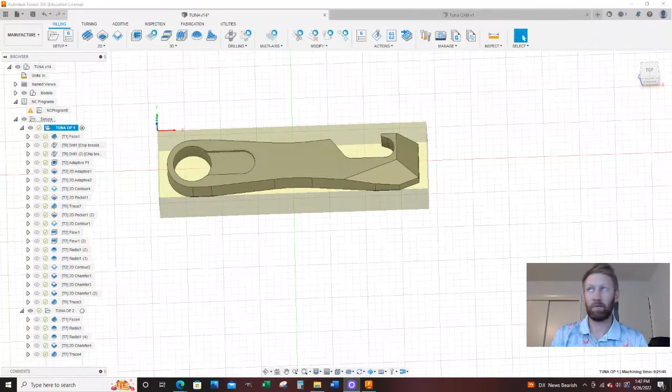Let's show you real quick what I'm talking about. So in Fusion 360, this is our stock right here, this yellow kind of weird box. And then we're going to set our work coordinate system, so our x0, y0, z0. After we get this all set up how we want, we're going to do a face mill pass and a drill, and we're going to call that Stage 1, because as you see, I have a whole lot of tool paths here.

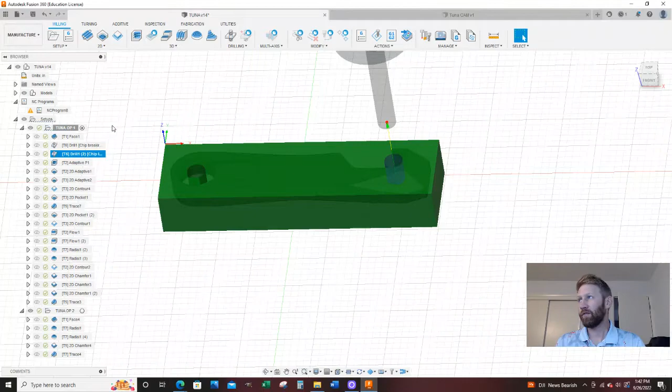So the first thing I want to do, this is my completed one, is we need to set up the stock. So when I refer to stock, I'm literally talking about the aluminum stock that we're going to start machining with. In this case, these are our saw cuts, I don't know how clear you can see it. We're going to make it in the X dimension 3.75 inches long, 1 inch in the Y, and 0.625 inches in the Z. So that's 5/8, 1, 3 3/4 if you want to use some fractions.

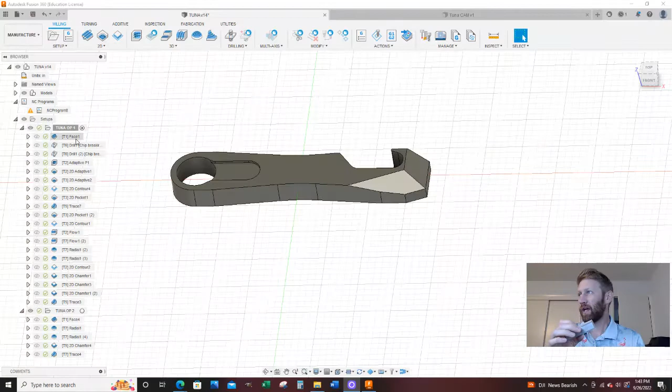And what does that represent? So that stock, this stock in my hand, represents this ugly yellow box right here in Fusion. That is exactly what we need to create first.

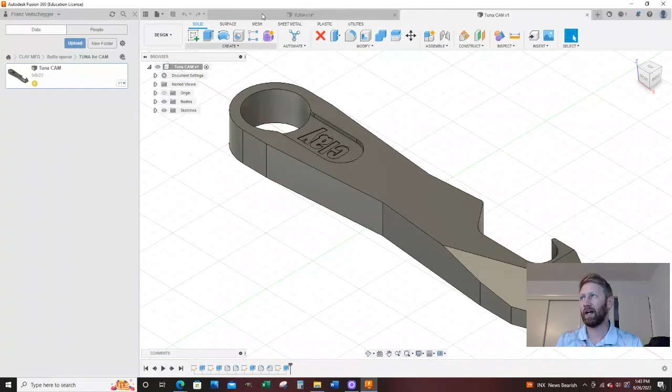So this is my completed one. Let's flip on over to where I would have left you off in my modeling. Before you get started, you could go ahead and save a different version or continue working off your version. I have several versions—this is my CAM for instructional videos, so I saved it separately. Generally in Fusion though, you want to keep all your designs in the same file and then build your CAM off that design; I'm just going to have a bunch of separate files. But here you are, you finish your modeling, everything works great.

We're in the design environment, so from design I need to hop on over to manufacture, and this is where we can set up our stock and our tool paths. So this is our CAM. Let me make sure I don't have a setup right here already. Oopsies, do I?

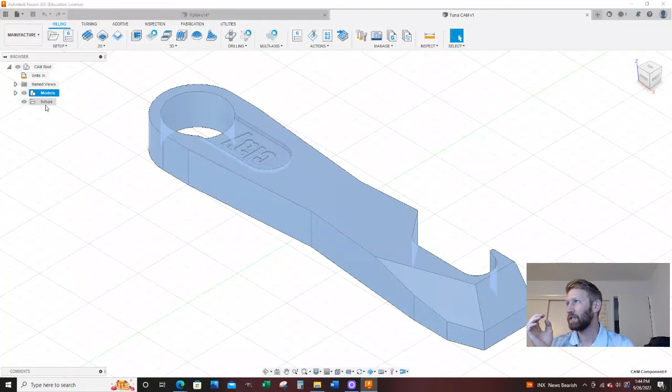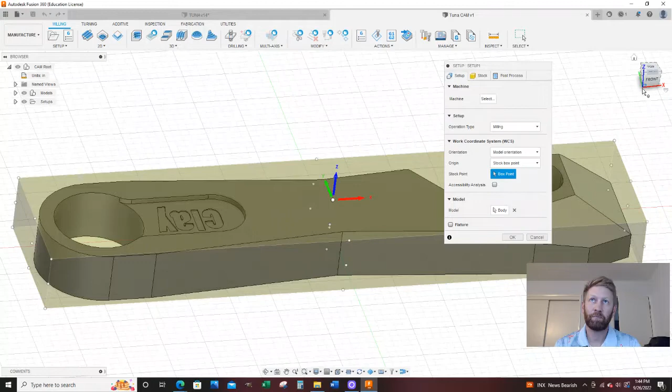Let's go. The first thing I'm going to do is go to setup and say new setup. I want to come over here—if your X, Y, and Z are oriented like mine, whenever I set up Fusion in the modeling, it should be how mine was, where if I'm looking at the top of the view cube, I have Z up, X to the right, Y away. It's like I'm in a 3-axis milling machine looking down at my part.

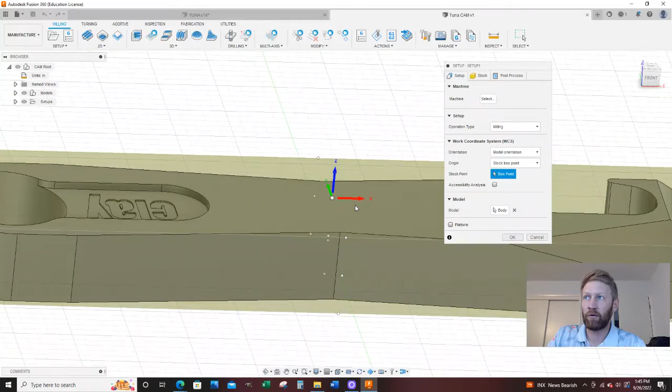So the top view has the most features usually that I can machine from one operation. And if your work coordinate system, the WCS, your XYZ, matches mine right now, where Z is up, X is going to the right, and Y is going away, then I'm just going to hop on over to my stock. Now, hold on.

If it wasn't set right, you can force it to how you want. So you'd go to orientation, select Z axis, and then force what direction I want my Z. And if the X and Y are still not going the right direction, it says Z axis and X axis, so I select my Z—I know I want my Z up—and then I would define my X axis as well.

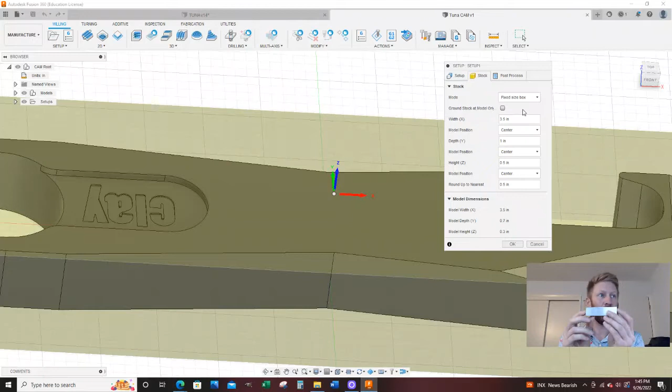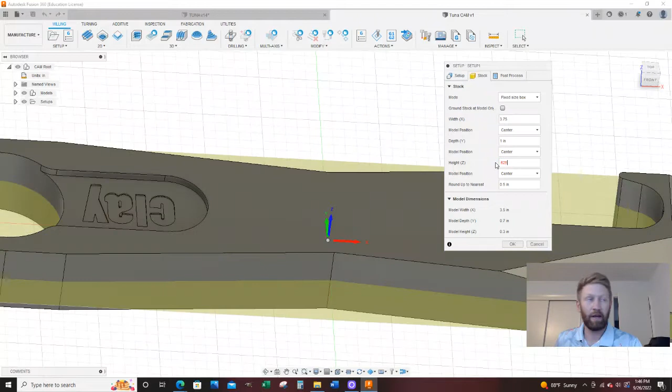But mine looks all pretty, so I'm going to hop on over to stock. For mode, I want to do a fixed size box because we're starting with a fixed size stock that I cut on my saw. In the X dimension I want 3.75, and I want the model position centered. Y is 1 inch, and the thickness of my stock is 0.625. This is just standard aluminum I can get at the store at the local metal supplier where I live—it's a real common size.

And here's where we got to start paying attention. You see, when I have my height and my Z, it automatically keeps—this is the model, it's the actual model, the bottle opener. Sorry, I've got a lot of projects on my head, so sometimes I get the wordage mixed up.

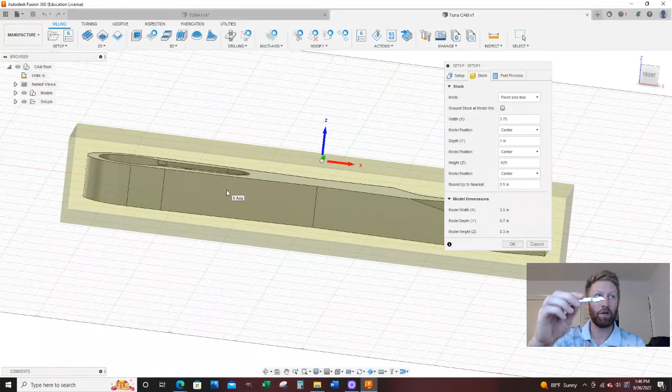But this is our tuna bottle opener. Now I want the model positioned at the top of my stock. So check this out—oopsies, let's see if I can change my screen. Apparently I'm looking at the wrong one. That's cool.

So the way this is machined out is I have the model positioned at the top because I want to elevate everything in my vise. And I'm going to have it sitting on parallels. We're going to use 1.625 inch tall parallels that are 1/8 of an inch wide, so it's a typical standard tallest parallel in a common parallel set.

And I want my model, that little bottle opener, to be at the top, so that way I've got extra material to grab down here, because the vise is going to clamp on with the tallest parallel about 100 thou, about 110, 111 thou. So I want to be safe. I want my model at the top.

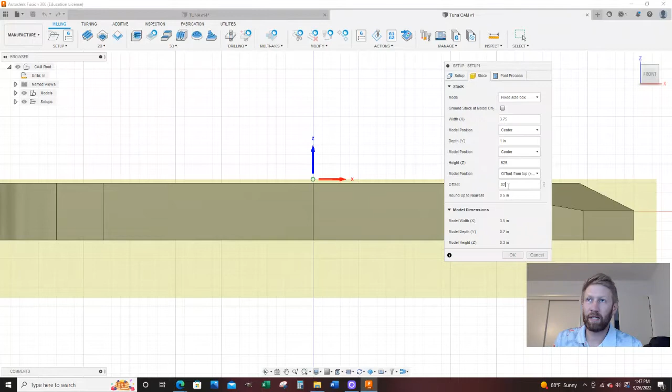So what I'm going to do is model position. I'm going to say positive Z, and we're going to offset this thing by 20 thou. I'm going to say 0.02, so I'm leaving a little extra. What I did was model position offset from Z positive, and then I updated 20 thou right here in the offset. And now we're on the same page.

So I want to leave a little material because I'm going to cruise down with a face mill and skim off that extra material. Now, our work coordinate system, we're determining how we're going to actually locate our work piece.

So in this example, I could leave it in the center, especially if you have a probe. You can probe on each side and then get your center. Even without a probe, it's usually more accurate to have your work coordinate system in the center, so in case your stock changes a little bit in the X or Y dimension, it's still centered.

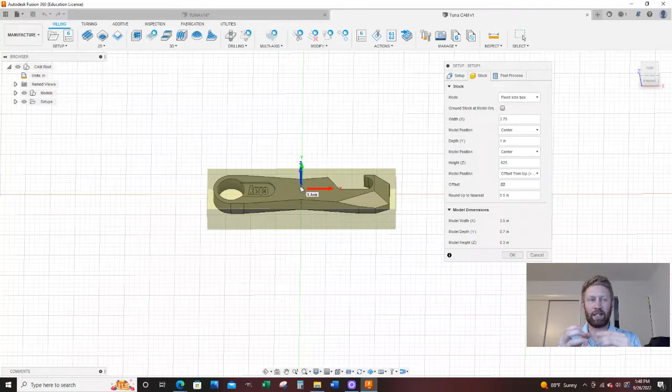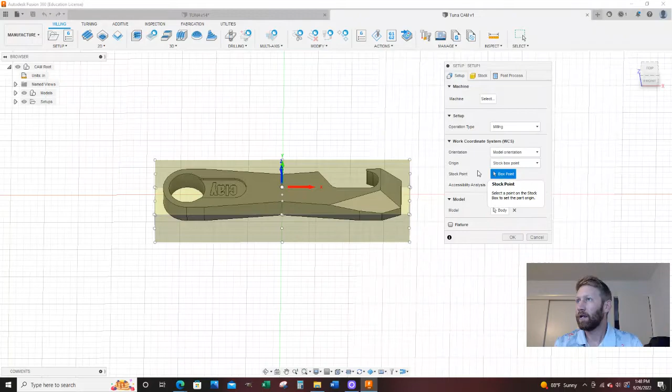However, to keep things easy, we're just going to put it, which is also a pretty common practice, on this back left corner. So I'm going to go to setup, and I want to choose a stock box point, and it's literally talking about a stock box point. I'm going to see my stock box highlighted in blue, and when it's like that, I'm going to come over here and click on this point.

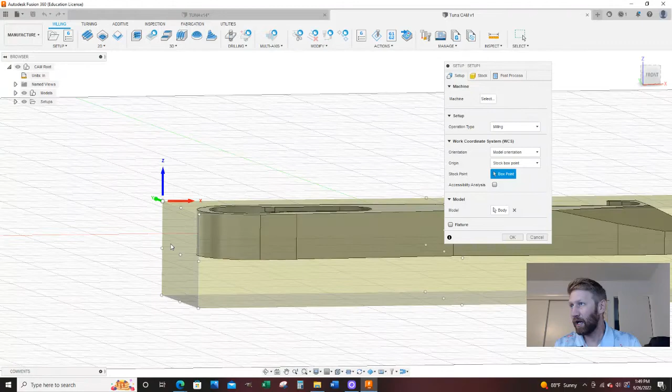So this means when I'm using my edge finder, we'll use a wobbler edge finder in this case, or a Haimer, I'm going to touch this off of my X, my Y, and the top surface will be my Z0. So if I look at the front, this is my Z0 reference plane, and this is my saw cut, and then this ends my saw cut, which I typically want to avoid clamping. And this is my Y, the part that's going to be resting against my dead jaw. That is how we're going to set it up for this one.

Makes it nice and easy. So, okay, there we go. We have set our stock with our model inside of it.

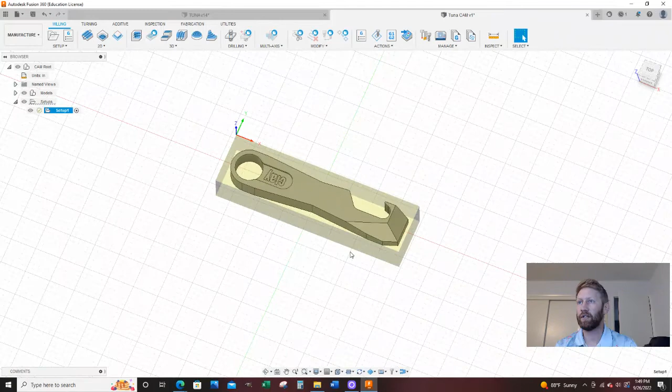Beautiful. The first thing I'm going to do is a face pass, so I'm just going to deck the top off, make it nice and smooth and a flat machine surface to work from, get rid of any surface imperfections, anyone dropping it off of a forklift during shipping, whatever. I want a nice clean surface to work with. Not every application needs to be faced, by the way.

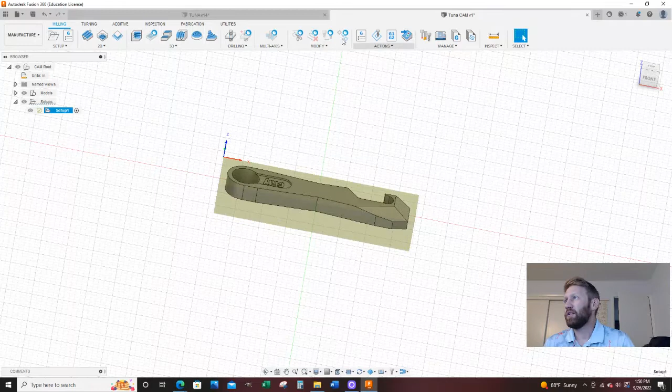How am I going to do this? I'm going to go up here to 2D, and I'm going to go face. And for my tool, I'm going to come up here and click on here.

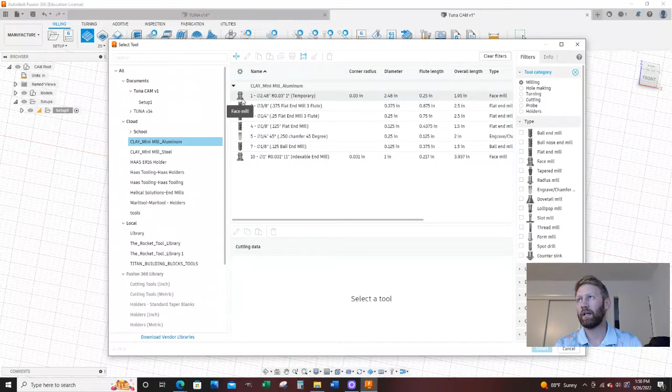Now on my website, I have my tool library posted, and this is the clay mini mill aluminum. I try to set this up the best I could for the time being, using the exact same equipment that I'm using. So for my face mill, I have a Maritool, it's a shell mill, a 45-degree shell mill. The icon you're going to see is not super representative of it, but it's going to work well enough for this application.

So yes, this needs work. If I get enough traffic, then I'll make it look more pretty, but right now we're going to deal with it. The other ones I have are Haas, so this is a whole entire Cat 40 tool holder. This is a cutter that I'm using. I buy a lot of the Haas tooling, and I'm not sponsored by anyone at all, out of my own pocket.

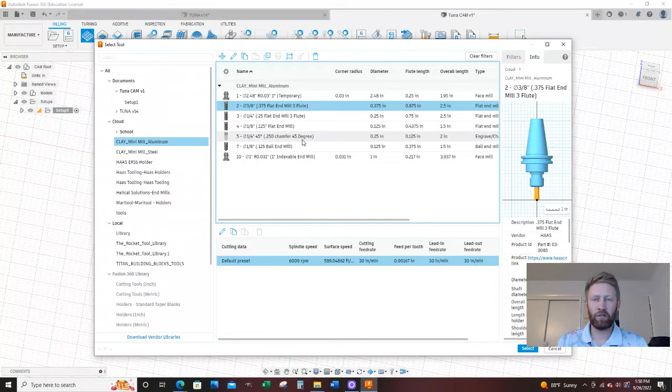The Haas tooling is super affordable. They've got nice feeds and speed charts. Going back to my Maritool, it's typically a little more expensive than Haas tooling, but I love it. This shell mill and tool holder I got, it's awesome. I love it, it cuts really well. Boom, boom, boom, these are all my tools.

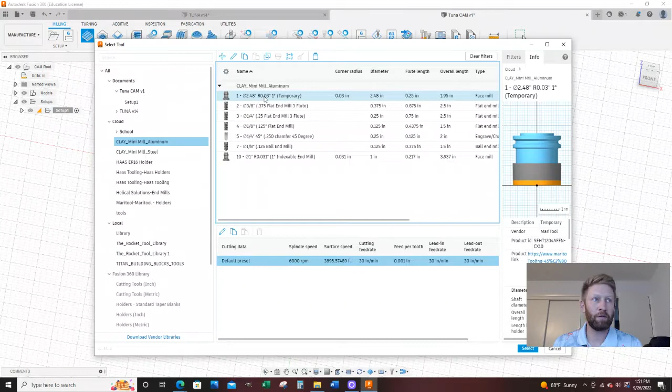Anyways, we're going to do tool number 1, which is going to be my shell mill. So I'm going to say select. I already have my parameters defaulted in here. Spindle speed 6,000, ramp spindle 6,000.

And this is chip load based on my cutting feed rate, which is 30 inches a minute, 30 inches, 30 inches. I've already run these, so I kind of know what to expect. Now,

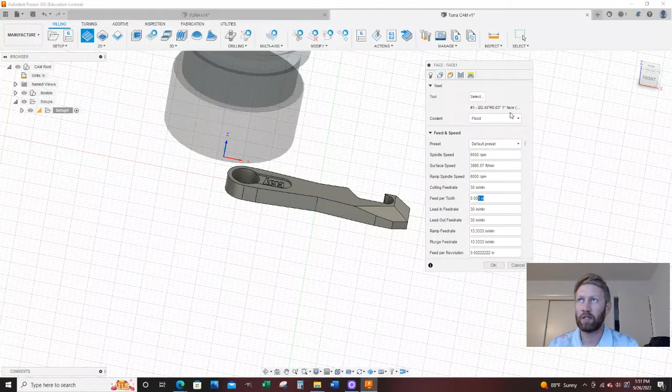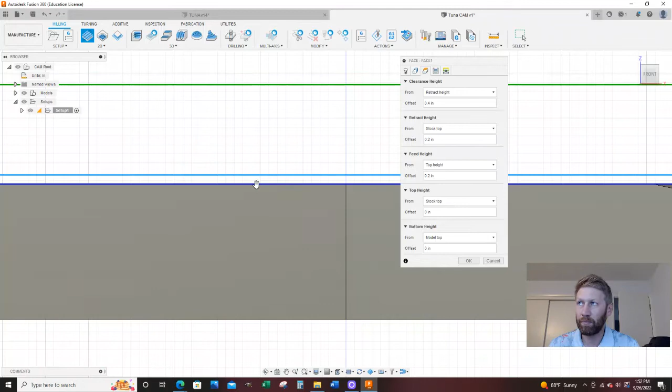Geometry, I'm not going to select anything, I'm just going to leave this default outline. I'm on my heights tab. Now my top height is my stock top and my bottom height is my model top, meaning that the lowest my tool is allowed to go is my model top. So this one would be your stock top, this kind of weird blue, and this darker bluish purple would be your model top. So it says the tool cannot go past the model top because that's where we want it to stop, right?

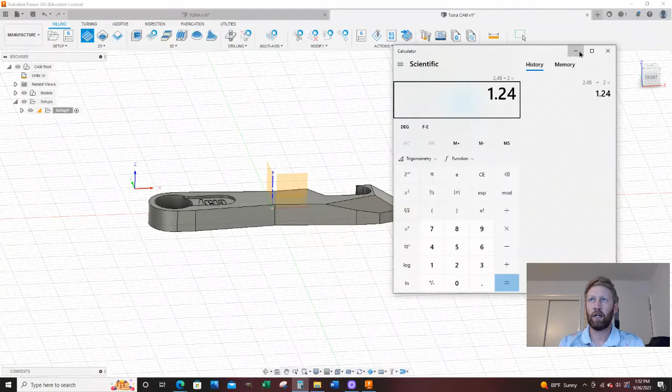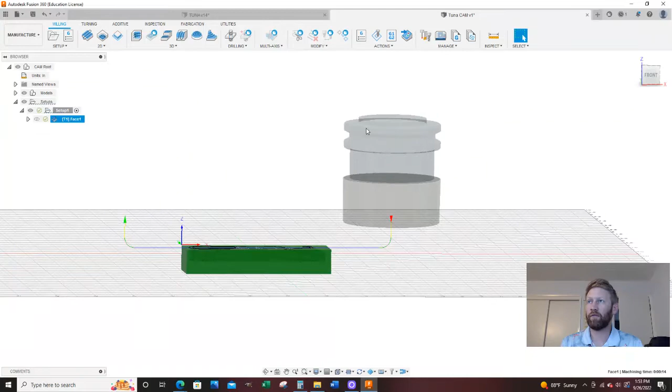And here you can see the face mill. I don't have the tool body on here, but here we go. It's going to come in, sweep down, cut, come all the way off, and then go up. And if you wanted to, you can go Actions, Simulate, and run this through your simulation.

Let's get it so we can see a little bit. I can say play, and it's just going to keep rerunning. So there we go, we simulated it. We're geniuses, we got it.

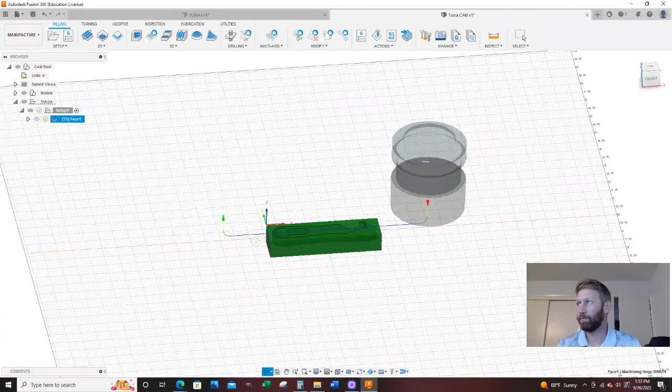Now the next toolpath, what I'm going to do is, I know in the future I'm going to have to flip this part over and machine the back side. So this is a completed top operation. I'm just holding it in a vise, machining everything out, but I somehow need an easy reference point when I flip it over to machine out the back side, because it's not a square surface, which we still could work around that.

I do have a square surface here, but it's really easy to just have a bore in something that goes all the way through, flip it over, probe, pick up that bore, and that's for your X and Y location. And then Z, I'm going to place at the bottom of it for a real accurate part.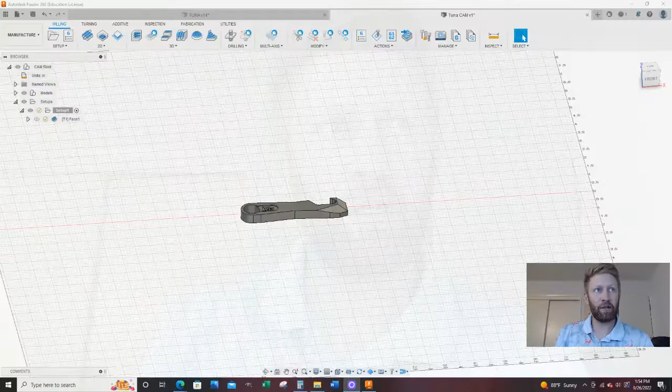But I want to have a bore going all the way through. And another thing, when I'm coming into these tight corners with an end mill where the radius almost matches the same radius as the part geometry, there's a whole lot of stress on that cutter, a whole lot of engagement. So that's a lot of times where you'll see chatter or where you'll see tools break because of real tight geometry. So I'm just going to relieve those holes.

I want to pre-drill this hole, so I'm just going to go ahead and drill this one too. Not always necessary, but my drill is far more efficient at going vertically down than my end mill is. So I'm just going to do that to try to minimize problems.

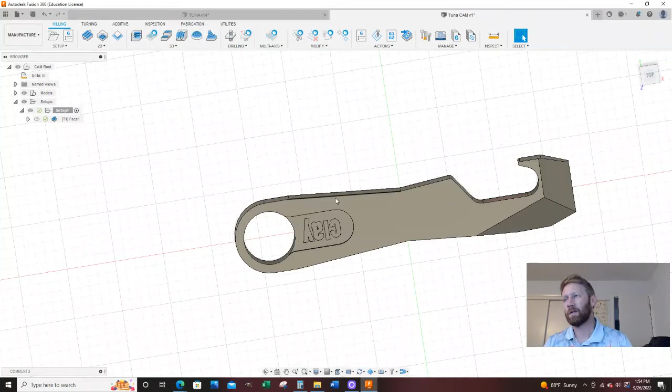And I know in the future I'm going to pop a big hole all the way through this one. When I'm coming down in a helix with an end mill, I want a little hole down there so the chips have a place to go through, so when the coolant's washing it, it can blow out the bottom and there's less chance I'm going to weld up my end mill. So that's kind of my mindset here. The next one I'm going to do is drilling.

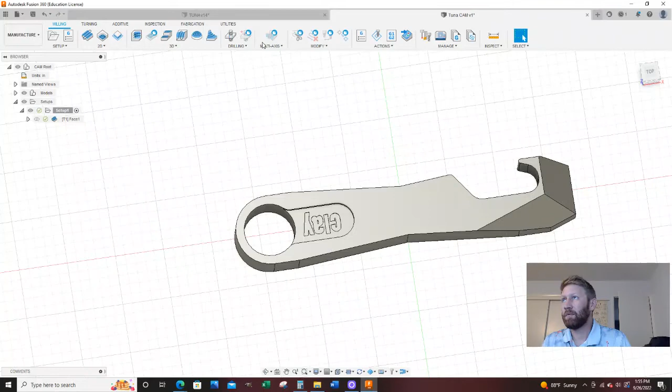I'm going to go drill. And I'm going to go to my tool library, and I'm going to go to my clay mini mill. And you see right now, it kind of filtered my tools. It only shows this one. Sometimes that can be helpful, sometimes it can be annoying. Right now it's helpful. But if that gets in your way, you can clear your filters and it shows all your tools. But I do want to use my 1/4 inch, where is it?

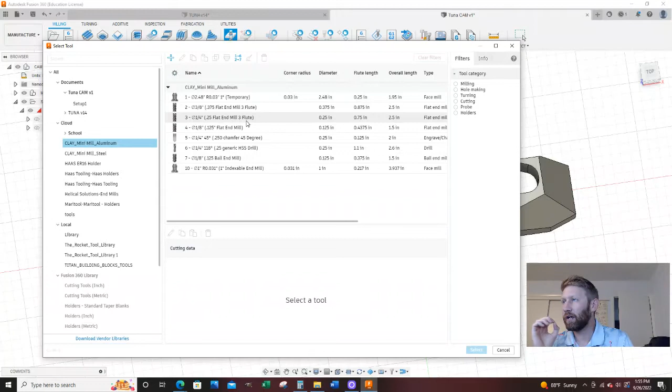Tool number 6, my 1/4 inch, just a high-speed drill, screw machine drill. Yes, I don't know why I'm drawing a blank. All right. And I think these defaults are going to work well for us. I have it at 3,500 RPM at 10 inches a minute. And these parameters are, again, for a mini mill 1 with a standard spindle on it, so nothing crazy on here. If you got a smaller machine, you're probably going to have to reduce my feeds and speeds. If you have a bigger machine, you're probably going to have to increase my feeds and speeds.

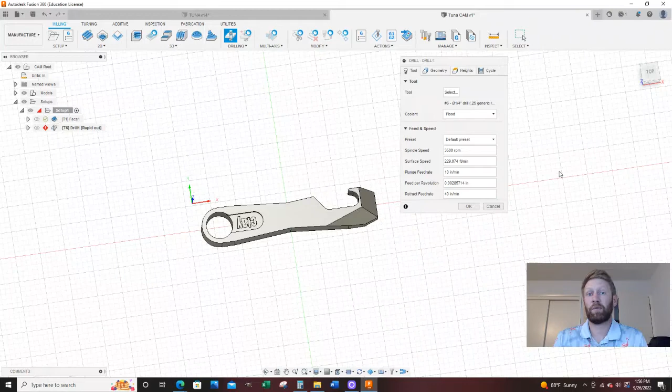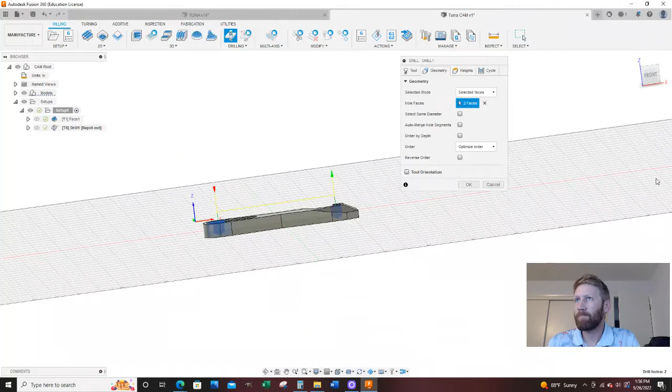So for geometry, we're going to select right in here. I'm just going to come in and select on that face. And then I'm just going to select on this face. And here we go. I have those selected. And let's go to heights. And as you saw on here, one of those holes go all the way through and the other does not.

Sorry, someone rang my doorbell and it's just kind of annoying me. Now I'm not thinking straight.

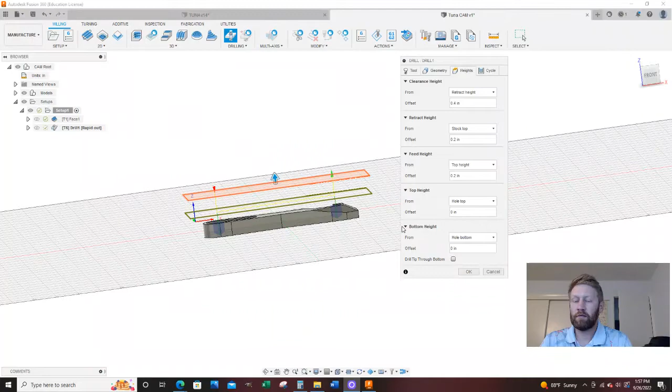So that drill does not go all the way through because I don't need it to, but this one I prefer it to since I'm coming in there and doing a big helix in. So let's not look at me. So for bottom height, actually, I'm probably going to do this in two different operations, because I'm going to come back here to geometry. I'm going to clear that out. So if I selected something I don't want, I just hit that little X. I'm going to come here. I'm going to select there. Heights, I'm going to say stock bottom. If I can read here, stock bottom.

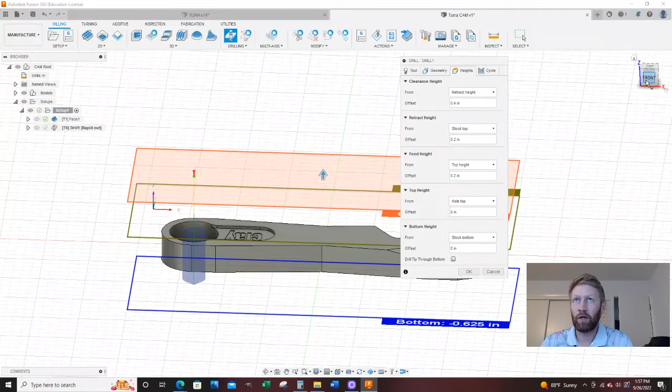And I want to drill the tip through bottom. And I'm going to go through an additional 20 thou, 0.02. So that way I'm drilling all the way through and I'm making sure, because sometimes when you poke through the bottom of a drill, it leaves kind of a heavy burr. So I'm going to go through just a little bit. And for cycle, to be careful, we'll do a chip breaking and we'll do partial retract. So I'll go down 300 thou before I have a partial retract. So I'll say 0.3. And I'm going to say OK.

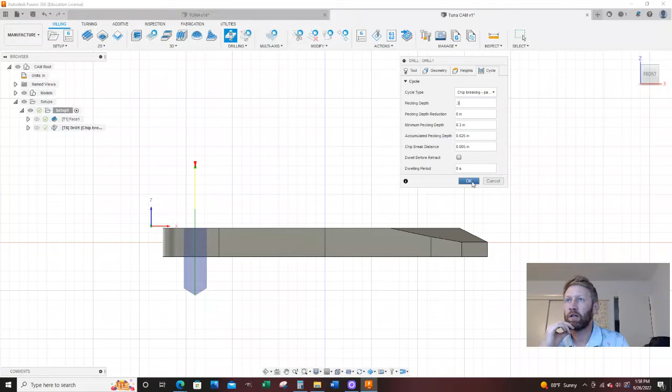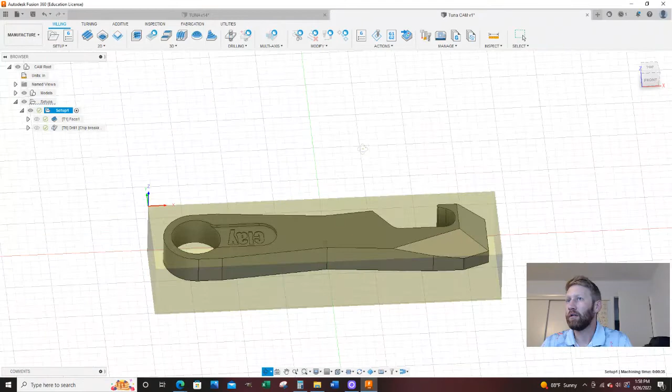And just so I didn't mess anything up, I'm going to look real quick at the other one I did. Yeah, so that all looks the same. I shot through the bottom. I know this all works, so I'm just kind of double checking so I don't lead you all around incorrectly. So on this one I did a 0.25 pecking depth. So if I don't crash it, I'm going to leave it. 0.3 is totally fine.

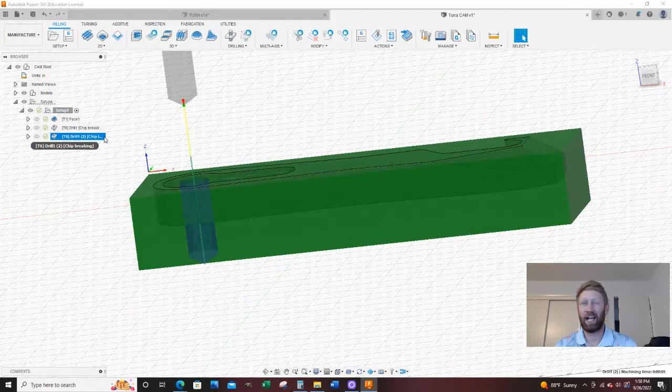Now I want to create another drill toolpath, but I don't need to drill this deep again. So I'm going to right click and say duplicate. And now I have this exact same toolpath again. So I'm just going to edit it. I'm going to right click and I'm going to say edit. And now I have this little dialog box here. And we already showed you how to screw up and deselect stuff. So on geometry tab, I'm going to clear out that face, and I'm going to select this face right here.

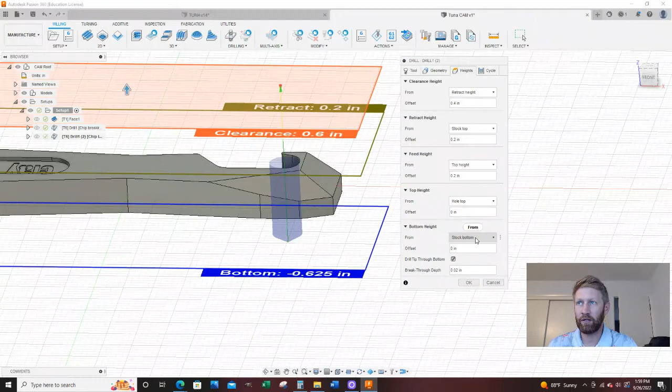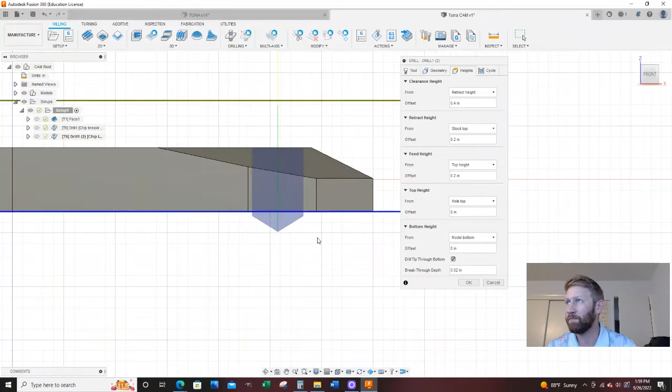And for heights tab, instead of stock bottom, I'm going to say model bottom, because I'm really just relieving that tight area. So when my 1/4 inch end mill comes in here, it's not trying to create chatter and it's trying to reduce all that engagement. So I'm going to say model bottom, drill tip through 20 thou, leave everything the same. So it just pokes through the bottom and I like it. And I'm going to say okay.

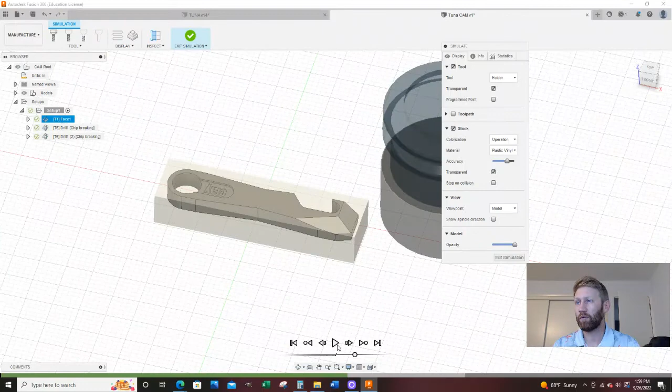And there we have it. So there's my through hole. Here's my hole that does not go all the way through. And if I want to run graphics, I can go like this, actions, simulate, and then I can run it all the way through. And that is it. I'm going to say exit simulation. So this concludes stage 1 of the Tuna CAM.